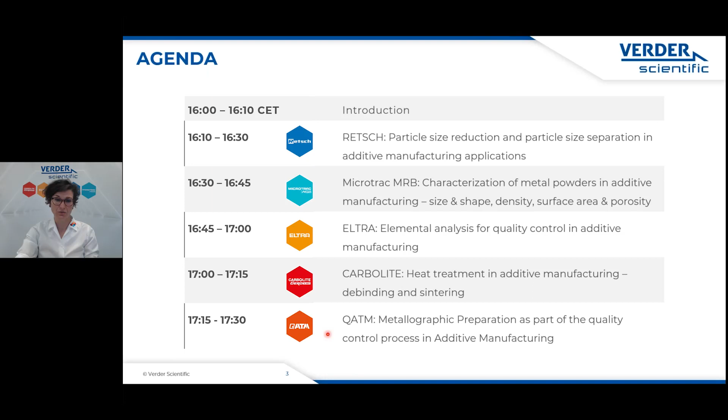I've already mentioned Verder Scientific quite a few times, but if you've come to this webinar via a newsletter invitation from one of our manufacturers or via their website, the name Verder Scientific probably isn't that familiar to you. So I would like to briefly introduce ourselves.

Verder Scientific is the umbrella, so to speak, under which our manufacturing companies ELTRA, Carbolite Gero, RETSCH, MICROTRAC, and QATM come together. And this umbrella is relatively large. We have 10 locations worldwide where development and production takes place, and around 22 sales offices of our own. We employ around 1,300 people worldwide.

So, but let's now get a closer look at our brands. Carbolite Gero is a leading manufacturer of high temperature furnaces and ovens from 30 to 3000 degrees C with a focus on vacuum and special atmosphere technology. And with more than 80 years of experience in thermal engineering, their products are used in research laboratories, pilot plants, and manufacturing sites worldwide.

The presenter for the Carbolite Gero part in this webinar will be Dr. Tim Ohnweiler from the International Sales and Product Development Team.

ELTRA is one of the world's leading manufacturers of elemental analyzers for rapid and accurate analysis of solid materials. Their elemental analyzers provide tailor-made solutions for a wide range of samples and concentrations. ELTRA's part in this webinar today will be presented by Dr. André Klostermeier, who is Product Manager and Application Specialist.

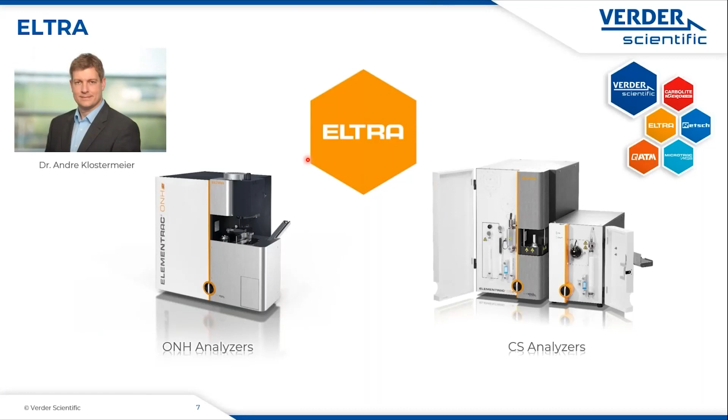RETSCH offers instruments for sample preparation and characterization of solids. They develop size reduction and sieving equipment, known for its excellent performance and operating convenience. The presentation will be held by Dr. Gerhard Beckers, longtime member of the RETSCH application team.

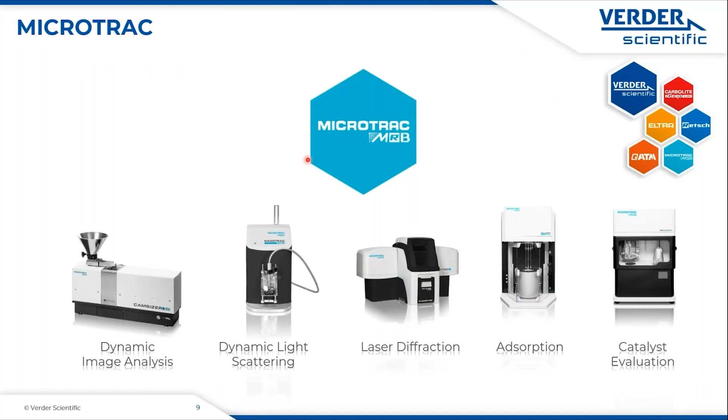MICROTRAC's product range offers solutions for particle characterization like size and shape, gas adsorption, surface area and pore size distribution, density measurement, and a lot more. Jörg Westermann, member of the International Sales and Product Development Team, will give you some more insights today. QATM is one of the leading companies for materialography, metallography, and hardness testing, and supplies both instruments but also complete laboratories, software, and consumables. Here, Parham Gemagami, member of the QATM Product Management and Application Technology Team, will hold the presentation.

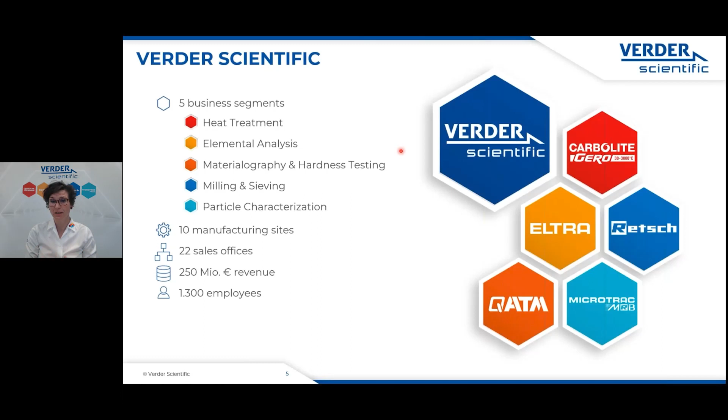So, as you can see, our companies cover different fields of applications which have one thing in common. They are all part of the quality control process in many industries and, in some cases, are also used in the production process. And what a great coincidence, additive manufacturing is a typical example for that.

In the quality control of raw materials like metal powders, MICROTRAC analyzers are used to determine particle size and shape, and ELTRA analyzers measure the carbon or oxygen content of these powders. Carbolite furnaces are employed in post-processing for debinding and sintering, and then ELTRA again comes into play when the element concentrations of the final components are analyzed for quality control.

This interdisciplinary approach within our group of companies means that we can offer you as our customers holistic solutions which take into account the whole process and not just one aspect. Here you can see that instruments from our manufacturers can be found in many parts of the additive manufacturing process chain, but more on this in the individual presentations.

Yeah, thank you, Rena, for your nice introduction. And I would like to welcome you to our presentation about additive manufacturing. I would like to directly start with the presentation about particle size reduction and particle size separation for different kinds of applications in additive manufacturing.

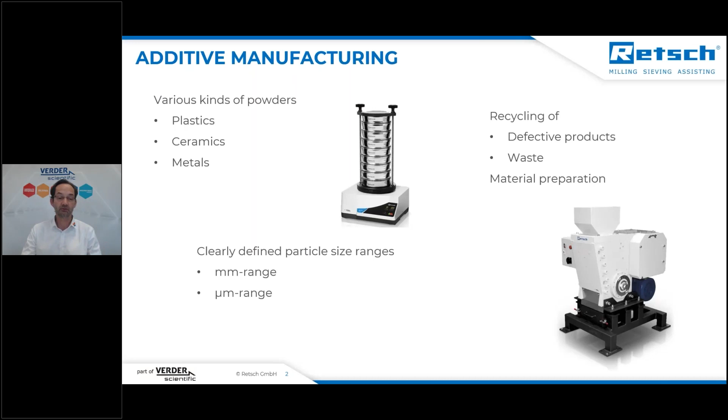When we talk about additive manufacturing, this covers various kinds of powders, and these powders can be plastics, ceramics, or even metals. These materials can have different sources, so the materials can come from recycling, like defective products which have to be removed into the process, or waste products like sprues from injection molding, but also raw materials have to be prepared beforehand. This preparation means the particle size has to be reduced or just analyzed or separated. Here we talk about clearly defined particle size ranges, so that can be millimeter range or even micrometer range.

So when we talk about particle size reduction, that means that the particle is ground, broken, milled, whatever. I've got 3 examples here for you, and I would start with the green bodies. So green bodies, like here, for example, made of metal, but also feedstock, or as shown here, a resin can be reduced in size. Starting with the green bodies, there was a task to grind this, let's say, pressed metal of several kilograms down to a size of below 2 millimeters for a recycling process.

But as these particles can be very hard, we need a strong machine to grind this material. And here we have used a jaw crusher, a BB500, and we have set this machine to a gap size of 1 millimeter.

That means the particles have to pass a gap of 1 millimeter, and then they need to be ground, they break down. And with this machine, we were able to grind several kilograms within a few minutes down to 2 millimeters.

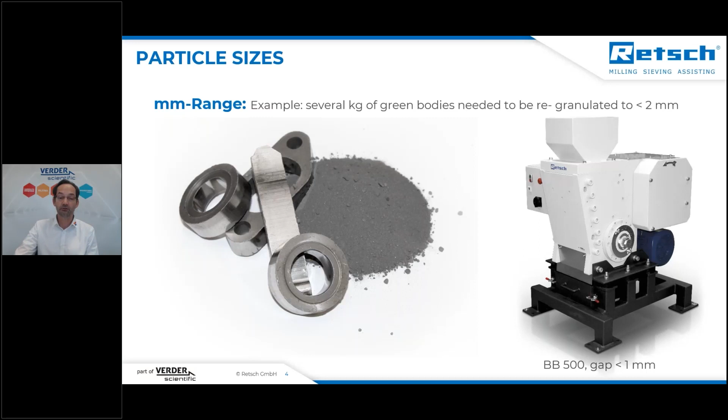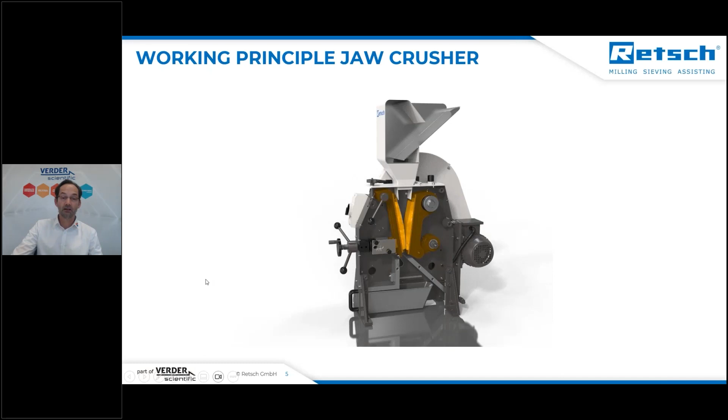Another application is recycling in the preparation of feedstock. So this is, frankly speaking, just a pressed powder into agglomerates, but these big chunks are too big to be processed further on, so they also need to be decreased in size.

But here the task was a bit more difficult, because for an injection molding or extrusion process, we need to grind the particles down to a few millimeters, but we had to avoid the generation of fine powders. This is quite difficult because it's easy to grind smaller, but you always end up with lots of fines in your sample.

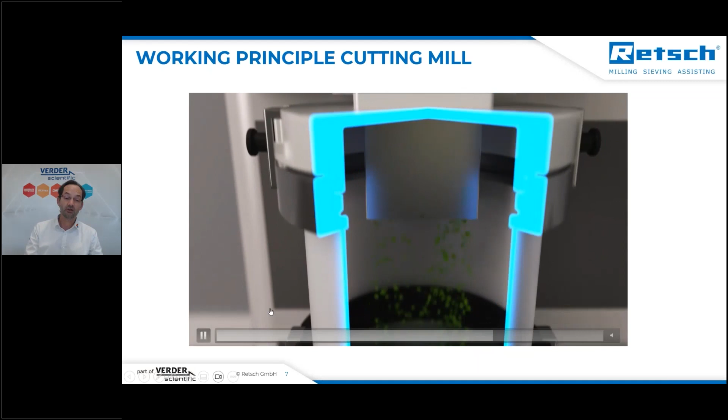So what happens inside the cutting mill? Here's a short video about the principle, where you can see the sample drops into the hopper, and then it enters the grinding chamber, where a rotor is rotating at a set speed. In this case, it was 400 RPM. While the material is rotating, it is cut between the knives and the cutting bars, and this continues until it is fine enough to pass the sieve placed at the bottom, so all the material can drop down afterwards into the collecting receptacle, from which it can be taken for the next step.

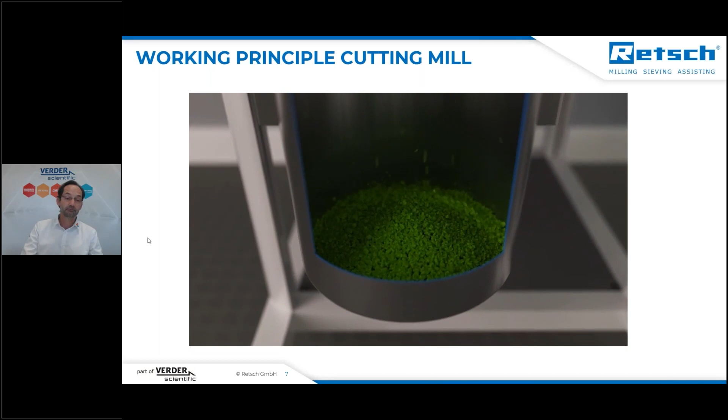So just switching to the next slide. Another application was grinding of resins down to a micrometer range. This is also easily possible, but you need a special machine for that. In this case, it was a resin with the size of 2 to 3 millimeters that had to be ground down to less than 50 micron to allow use for 3D printing. We need this small size to avoid clogging of the nozzles, and then we need a very fine powder.

Here we have used an ultracentrifugal mill, ZM300, with a revolution speed of 18,000 RPM. This is a very high speed, I will tell you later on what this means. Using a ring sieve of 0.12 millimeters allows us to grind more than 60 to 70% of the material to less than 50 micrometers. So what happens inside the ultracentrifugal mill?

Here you can see the machine opened, and inside the machine you find a small cassette, a metal cassette. Inside this cassette, the grinding takes place. Normally this is closed and the material drops in from the top into this cassette.

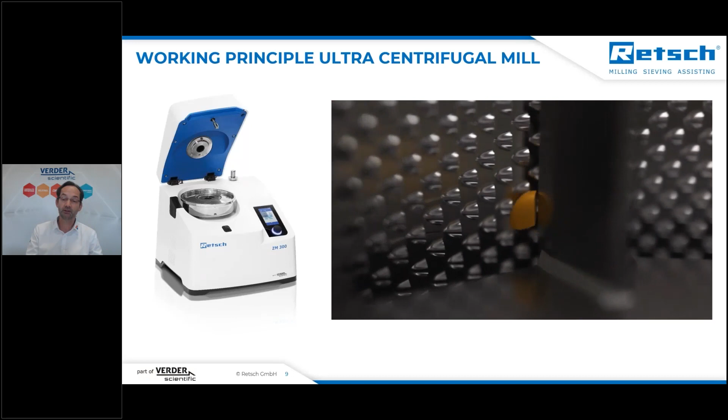So what happens during grinding? The material drops in either manually or with a feeder, like shown here, into this cassette. It enters the grinding chamber where the rotor is rotating at very high speed, causing the sample to impact against the rotor teeth, and subsequently it is ground by shearing along the sieve which surrounds the rotor. Depending on the opening of this sieve, you can create very fine powders or eventually even coarser sizes. Then the sample can be taken by just taking out the cassette, and you got your fine powder to be used for the next step.

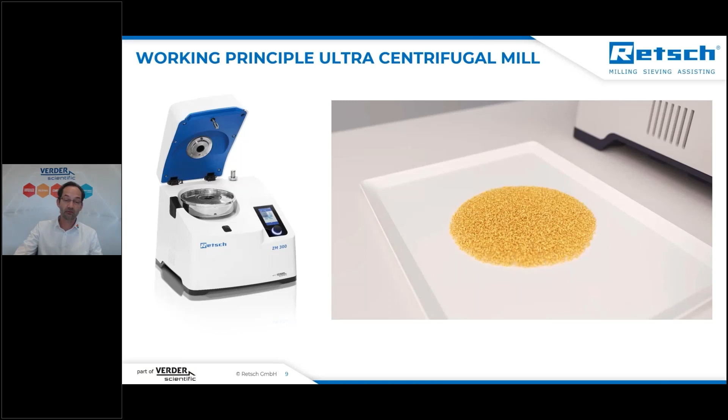As I mentioned before, we have used for the resin, for example, a sieve of 0.12 millimeters, and we were able to grind 60 to 70% below 50 micrometers. But we need all of the material to be fine enough to avoid clogging of the 3D printing nozzles, so sometimes it's necessary to remove oversized particles. This can easily be done with a sieve shaker.

So what does that mean? We've got a possibility to use sieves to separate particles. Either you separate these particles with a certain sieve size, or you can completely analyze the particle size distribution of your sample. Here we are talking about the micrometer range.

Here I show you just an example of the separation of a metal powder, where particles bigger than 53 micrometers had to be removed in order to allow the use of this fine powder for 3D printing.

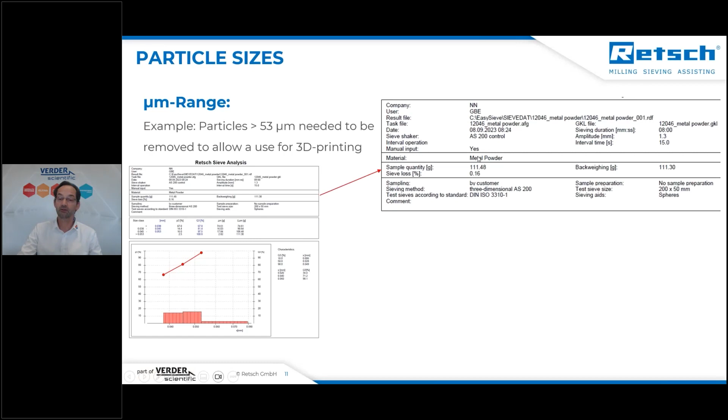This now shows a complete protocol of the sieve analysis. We've got detailed information about the complete process, like information about the material, the kind of sieving process, the machine used, and lots of other information. Most importantly, you get a tabular result at the end, where you can see how much of your particles are smaller than a certain size.

In this example, 67% of the whole powder is smaller than 38 micron. On the other hand, you see that 2.5% of this powder is bigger than 53 micrometers. So we were able to remove this fraction of bigger particles from the whole sample, recovering 97% that can then be used for the 3D printing process without any problems.

It's also possible to get lots of other information or characteristics, which can be individually set in the software to be calculated and give you more information about the particle size distribution of your product. So this is just a sieve analysis result. How is it produced? For this purpose, we use a so-called sieve shaker.

The sieve shaker is used to take a lot of sieves. Here in this example, we've got 8 sieves on a collecting pan, and the sieves are set up in a descending order, meaning we've got a big sieve on top and decreasing mesh sizes in the other sieves.

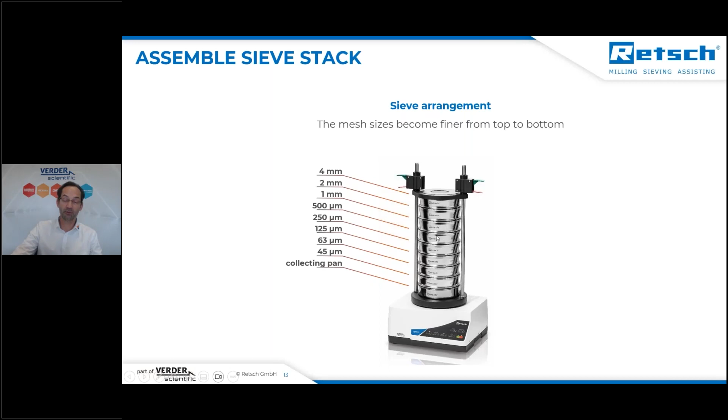This is done with a sieve shaker, meaning the whole sieve stack is jumping up and down, as shown here. With this vibration, the particles start to jump, as you can see in slow motion, and this allows the particles to completely rotate and be compared with the mesh in another orientation.

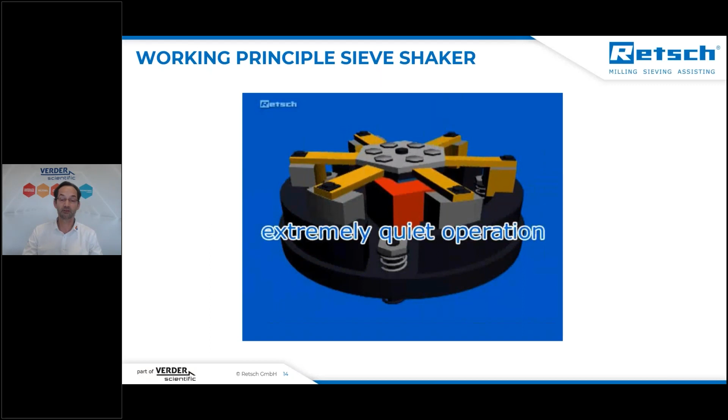So you are able to separate all the particles by moving them very strongly, and this is done with an electromagnetic drive. As we use electromagnetic drives, you've got a very quiet operation, which is also very comfortable to use. So far about the possibility to separate particles with sieve shakers.

Thank you, Rainer, for the very nice introduction. It's my pleasure now in the next 15 minutes to guide you through the products that MICROTRAC MRB is offering for the 3D printing community. That means we will speak basically about the characterization of metal powders with respect to the size and shape of the particles, as well as density, surface area, and porosity.

My name is Jörg Westermann. I'm working for MICROTRAC MRB for 17 years, as a product specialist, and I have some experience with metal powders and our customers in the metal powder community.

In this presentation, we will be talking about ISO ASTM 52907, which explains methods to characterize metal powders for 3D printing. We will also mention some other ISO standards related to density, surface area, and porosity of metal powders and additive manufacturing parts.

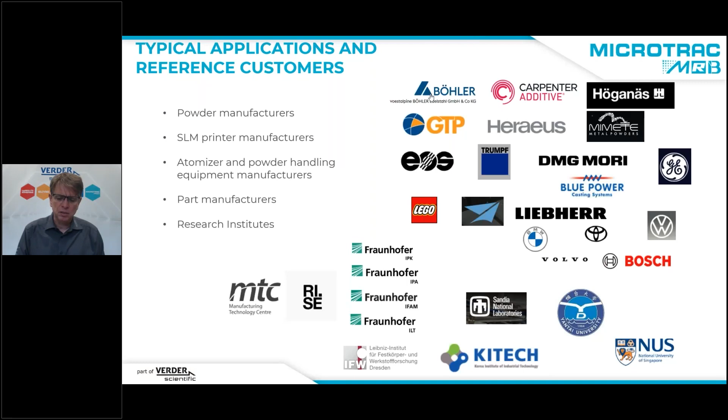Our customers in the additive manufacturing community come from the whole value chain. Our instruments are used by powder manufacturers such as Böhler, Carpenter, or Höganäs. We sell to printer manufacturers such as EOS, Trumpf, DMG Mori. We sell to companies producing atomizers and powder handling systems, and to companies producing parts using printers and powder, such as automotive or aerospace companies. And last but not least, we sell our instruments to research institutes such as MTC in the UK, RISE, Swerea, Kimab in Sweden, and Korean, Singapore, Chinese, US, and German institutes and universities.

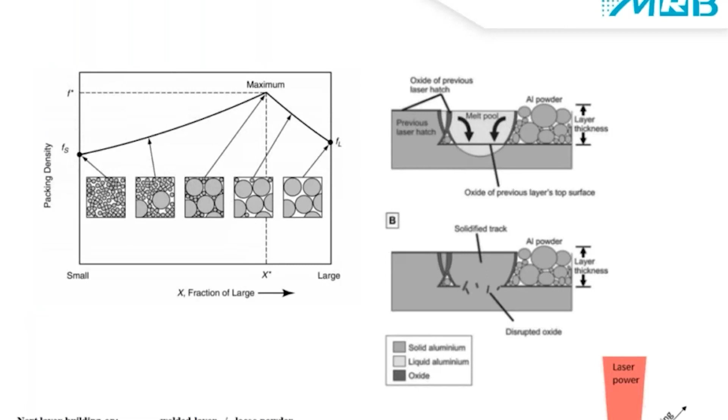So why is particle size and particle shape analysis important for additive manufacturing? First of all, it's about the packing density. When we have powder with a size distribution that is nicely wide, the gaps between bigger particles can be filled by small particles, achieving good packing density. If we have only small particles or only big particles, this cannot be achieved. Also, the oxide content—how much surface area the particles have, how much contamination is on the surface—depends on the particle size distribution of our powder.

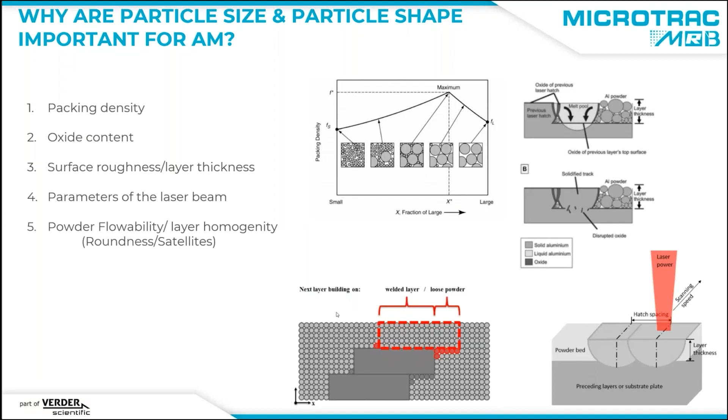Surface roughness and layer thickness matter, since additive manufacturing in many cases is a layer-by-layer process, and if we have large particles we cannot achieve thin layers. The parameters of the laser beam also depend on the properties of the powder—larger powders need different energy to melt than smaller powders. Last but not least, when creating layers in the manufacturing machine, the flowability of the powder has a big influence on the homogeneity of the layers. A nice flowing powder consisting of round particles with few satellites achieves a more homogeneous layer than irregular shaped particles. There are always exceptions to the rule, but this is the basic idea.

So when powder is sold or purchased, the powder quality is checked, and density, particle size, and particle shape are important parameters to understand if the correct powder is being used.

For the size analysis, 3 different methods are recommended by the standards and guidelines. The key methods used in the field are sieving, dynamic image analysis, and laser diffraction. Our product portfolio covers all these 3 methods.

Our sister company RETSCH is selling sieves and sieve machines, and MICROTRAC has the complementary dynamic image analysis and laser diffraction.

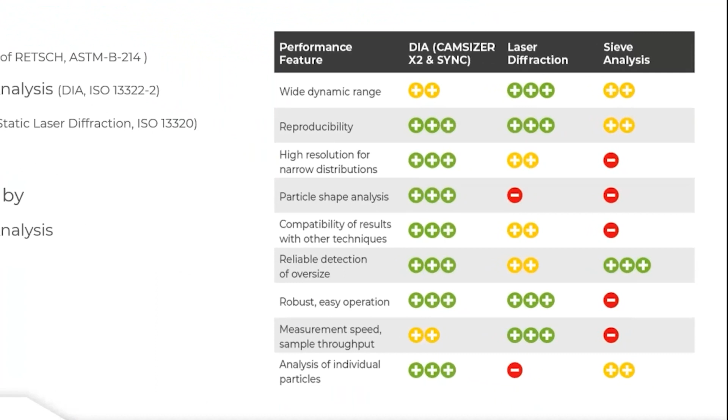When we look at the different methods, we can see that they have advantages and disadvantages. For example, when we look at the width of the dynamic range of the particles, we have small particles and large particles. If the small particles are much smaller than the big particles, then laser diffraction is the method of choice. The sieving and CAMSIZER cannot measure such a wide range of particle sizes.

However, for additive manufacturing, particle size range is typically from 5 to 45 microns, or maybe 5 to 150 microns. In this range, all the different methods provide good results. Repeatability and reproducibility are also important topics, as well as the resolution.

If I have mixes of particles, mixes of different samples, by dynamic image analysis I can see the blend of powders more clearly than by methods like laser diffraction or sieving, where the resolution is not as high.

Particle shape analysis is a unique feature of image analysis. It cannot be done by laser diffraction or sieving, and dynamic image analysis also offers the possibility to emulate the results produced by sieving. So if the old way to measure the size distribution was a sieving method, then with the imaging method we can get results which are very similar to the sieving method.

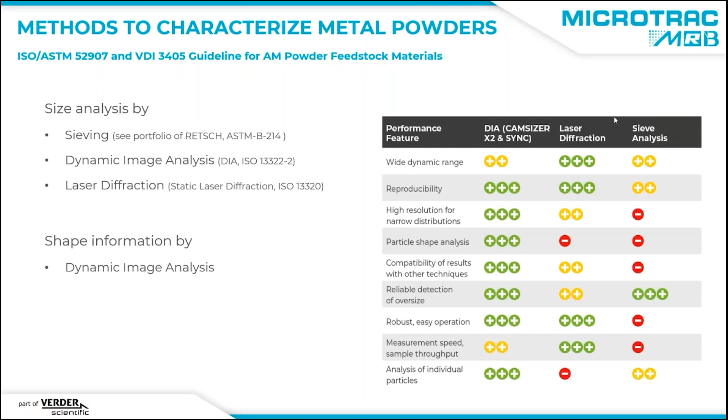The sieve shaker can also detect particles which are too large, and the image analysis can detect large particles as well as odd-shaped, bad-shaped particles like needles or flat particles.

Operation of laser diffraction and image analysis is typically much faster and much easier than the sieving operation, which needs more time and is much more time consuming. So the measurement speed for image analysis and laser diffraction is higher, and the big advantage also in dynamic image analysis is that we can see the results for individual particles. We can measure not only the size, but also the shape of single particles.

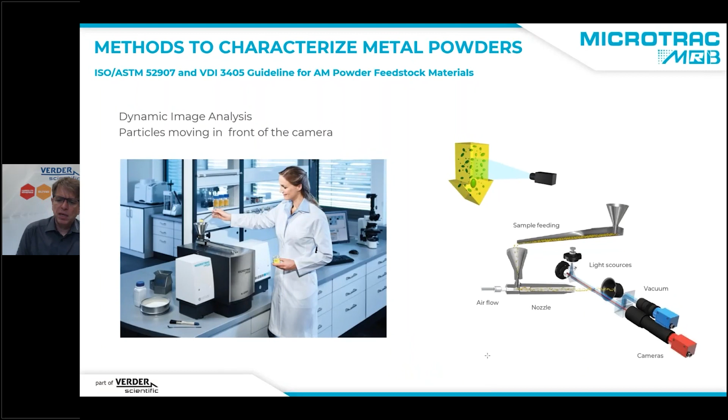So how does the dynamic image analysis work? Basically, what we do is have a camera and let the particles move in front of it. This is the basis for the name dynamic image analysis. We have a camera at a fixed position and we are moving the particles in front of the camera.

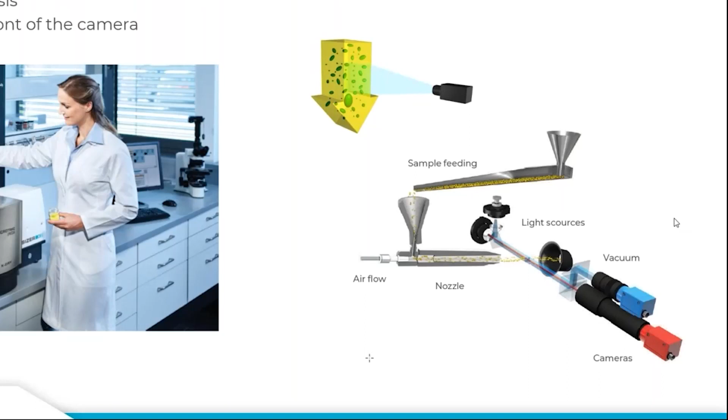In reality, what you do is take a teaspoon or 2 teaspoons, maybe 5 to 15 grams of metal powder, and put it in a funnel. Then we have a hopper. The material moves on this hopper, falling into a small funnel, and with air pressure the particles are dispersed. That means we have single particles, not many particles at the same time. Then these single particles fly through our detection area, where we measure the particle size with 2 cameras, and then the particles are collected in a vacuum cleaner.

This way we can measure the size of the particles. For example, we can measure the thickness or the length of the particles. Of course, if we have nice particles like the round particle in the middle, then width and length are the same. But if we have irregular shaped particles like the one on the bottom, we get different values for length and width, and both numbers are interesting because they tell us if the material is nice and round, is homogeneous, will flow nicely, or will be a particle that creates problems when we create our layer in the printer.

Dynamic image analysis very often allows us to see the picture of the particle, and we can see the numbers calculated for this single particle. We can calculate the size of the particles, but also numbers which describe their shape. For example, the width to length ratio tells us whether we have nice round particles, or irregular shaped particles with satellites, and we can see if the quality from one batch is the same as the quality of the next batch.

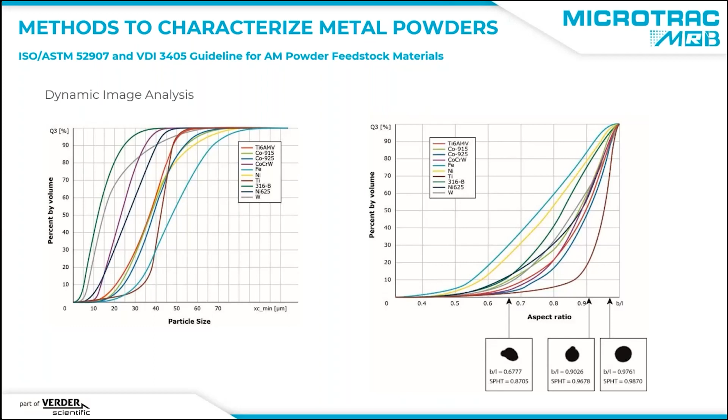The dynamic image analysis works independent from the material type that we have. We can measure all types of metal powders which are commonly used in 3D printing. It doesn't matter if we're looking at titanium powders for medical applications, steel alloys, nickel, or tungsten. All types of metal powders can be measured by dynamic image analysis, and both the percentage of particles versus particle size and the percentage of particles versus particle shape can be measured independently.

So I can see how many particles are large and how many particles are small. Do we have too much dust in the sample? But we can also see, yes, all our particles have a nice round shape, or we have a lot of irregular shaped particles in our sample.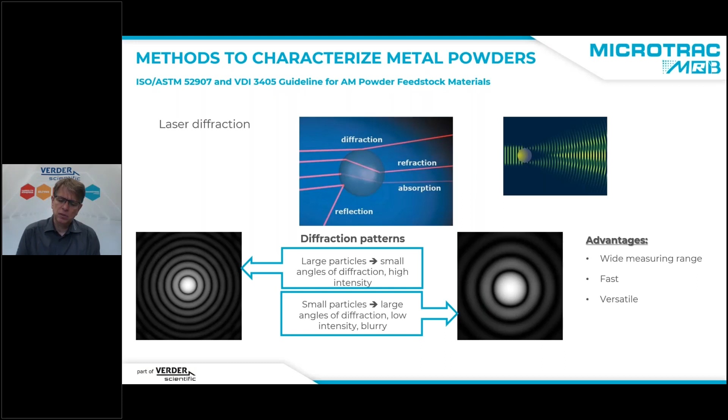The second method I want to mention today is laser diffraction. What happens here is we shine laser light onto our particles. When the wave of light interacts with the particle, we have diffraction, refraction, absorption, and reflection. This diffraction for the relatively big metal particles causes a diffraction pattern, and this is what we measure. So we measure the light intensity and the direction of the scattered light. From this, the instrument calculates the size distribution of all particles, because the big particles scatter the light forward and the smaller particles scatter the light sideways.

The instrument for laser diffraction is the so-called Sync. The previous model was called S3500, and the S3500 has actually been used in many quality control labs for the metal powder community, so it's maybe a very common instrument there. The latest model is called MICROTRAC Sync.

Both instruments feature the same laser setup. We have laser light which shines on the sample. At the sample, the light is scattered. We are using 3 lasers from 3 different directions which scatter the light onto 2 detectors. In addition, the camera allows us to measure the particles in images. So we can see images and scattering pattern, and we can calculate laser diffraction results and imaging results at the same time. This is a very unique combination which is not available in any other instrument.

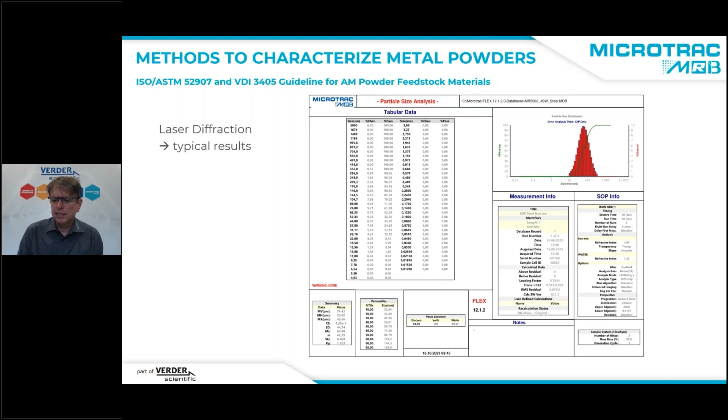The results that we get are basically the size distribution from the laser diffraction experiment. So we get the percentage of particles which are smaller than a given size, or we can get the derivative distribution - it's just a matter of calculation. In addition to the size distribution, with the Sync instrument and the integrated camera, we can also get pictures of our particles, and we can see if we have nice and round or more irregular shaped particles in our sample.

In addition to particle size and shape, MICROTRAC offers also measurement of the density of the powder. Here we have an instrument called Bel-Pycno, and what we do basically is we give a certain mass of powder into a sample chamber. Then we load the sample chamber with gas, and the pressure that we measure tells us how much volume in this sample chamber is occupied by the particles. This is typically done with helium, so it's a helium pycnometer.

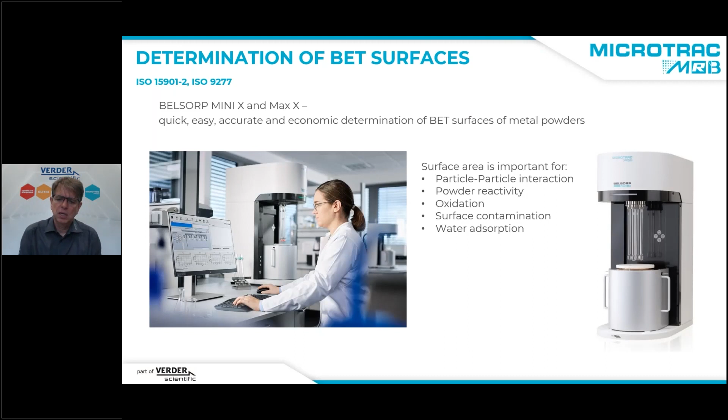In addition to the density, in many cases it's also interesting to study the surface area of the particles, how large is the surface area of the particles, because the surface area tells us about the possible particle-particle interaction. The more surface area, the more reactivity, the more interaction, the more contamination, water adsorption, and also oxide layer on the surface we may have.

So the surface area is analyzed by the so-called BET method. The instruments for analyzing the surface area are the Bel-Sorb Mini-X and Max-X. These instruments use the procedure from Brunauer, Emmett and Teller, BET, for studying the surface area. Basically, what happens is you cool the sample to the temperature of liquid nitrogen. Then nitrogen molecules are let into the chamber, and these nitrogen molecules condense on the surface of our sample, because it's the temperature where they freeze, basically. And then the surface is covered slowly but surely by these nitrogen molecules.

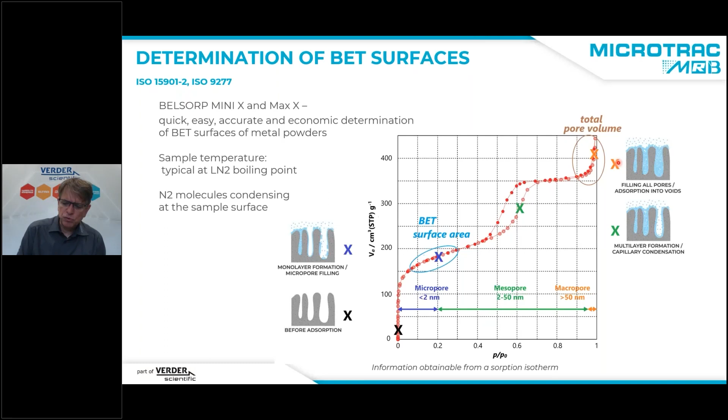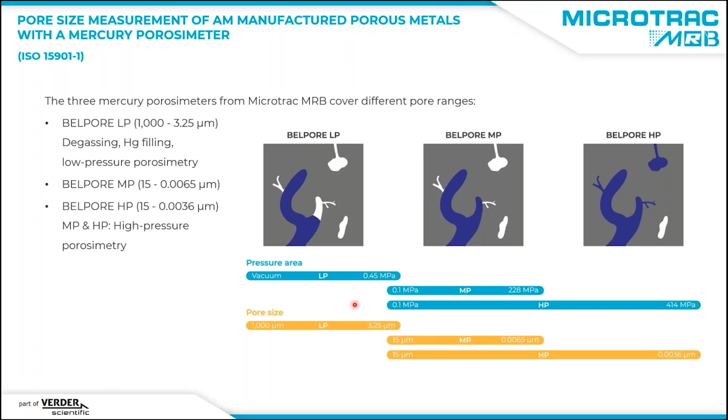Last but not least, it's also interesting, especially if you have printed parts, to study the porosity of the material with a mercury porosimeter. That means we have liquid mercury, and we apply some pressure to press the liquid mercury into our sample material. The sample material, as I said, could be the powder, which is usually quite compact, but it could also be a finished part.

So we press the liquid mercury into the part, and we can study at which pressure the pores are filled. If we apply a low pressure, the liquid mercury will go into the large pores, and the higher the pressure, the smaller and smaller pores can be filled.

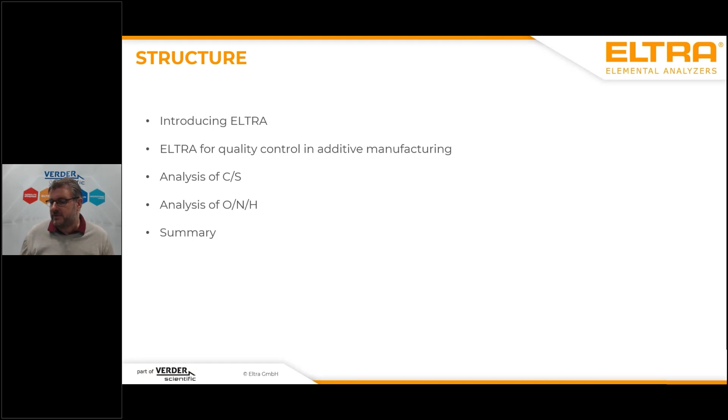Let me give you a short structure of what we are talking about. First, I will introduce ELTRA - maybe you know us or maybe you don't. Then I will give you a short idea of what ELTRA analysis and quality control means in the additive manufacturing process. Then we will talk about the most prominent analysis topics for us, which means analysis of carbon and sulfur, and analysis of oxygen, nitrogen, and hydrogen. And then at the end we will have a short summary, and then we are finished. Let's start.

ELTRA is a company located in Haan, near Düsseldorf. We were founded in 1981, and our portfolio is combustion and inert gas fusion analyzers. We are focused on the analysis of carbon and sulfur and the oxygen, nitrogen, and hydrogen content. In addition, we also have thermogravimetric analyzers.

For additive manufacturing, usually the carbon sulfur content is of interest, as well as the oxygen, nitrogen, and hydrogen content, because these elements influence the properties of the powder as well as the finished products.

Our functional principle for all analyzers is always the same. We have a sample, put some energy on it, and then the sample combusts or is burned or melts - however it is destroyed. During the destruction process, we have some carrier gases, which usually mean oxygen or nitrogen, or maybe also just helium. Then we measure the released gases, which could be CO2, SO2, and also hydrogen and nitrogen. We always have a destructive analysis, and we are always analyzing gases in the sample.

This is the common principle. But keep in mind that depending on your sample, or the requested analysis, the applied technique is a little different, and all settings for the analysis are a little different. However, we can provide full solutions for every common sample.

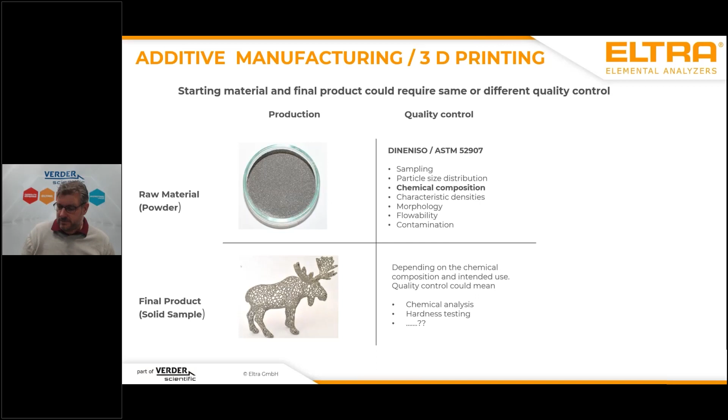What element has the biggest influence? There's no single most relevant element, but especially for medical products, hydrogen measurement is a bit more important than other elements, because of the effect of hydrogen embrittlement. For medical applications, a break inside the human body would be really dramatic, and this is something you'd like to avoid.

You cannot predict the influence of an element for every matrix, but generally: carbon influences technical properties like melting point and hardness. Sulfur influences machinability. Oxygen is an indicator for good tendency for corrosion. Nitrogen can influence hardness. And as mentioned, hydrogen can dramatically influence the stability of a product - is this product really stable when you use it? For this reason, hydrogen analysis is highly recommended, especially for aerospace and medical applications.

What does this mean in detail? As I mentioned before, we have to provide different solutions for carbon, sulfur, oxygen, nitrogen and hydrogen analysis. The usage of our analyzers is, in sum, very easy.

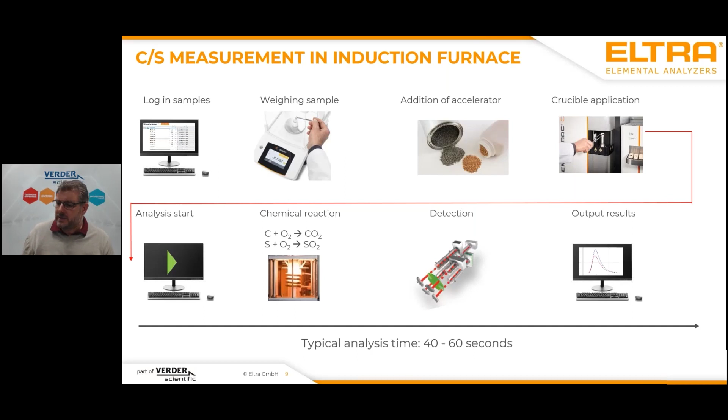The basic things important for carbon sulfur analysis with ELTRA are the general application settings. We are free to analyze every form of sample, which means you can apply powder, drillings, chips, granule samples, or solid samples in any shape. This is a big advantage of this technique.

When you're used to performing measurements with optical emission spectroscopy, you usually have to provide a special sample shape, or maybe have to take your sample and disintegrate it in acid. But for combustion analysis, it's very easy - you just take your sample, put it in the crucible, and then apply your accelerator.

Just to give you an idea about typical results - we have nickel powder analyzed in an ASTM test cycle. We get this powder, put it in our crucibles, add the accelerator, just 1.7 grams of tungsten, put it on the pedestal, and run all these samples. These are the typical measuring curves you see here.

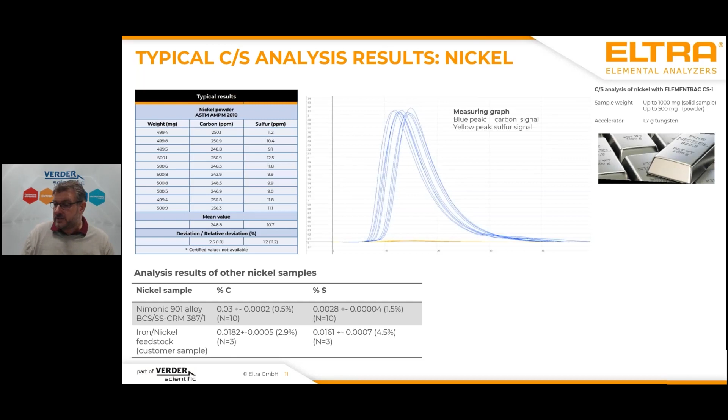The application doesn't have to be changed, and you can make a reliable analysis for a lot of samples which you get in your laboratory. But usually you are fixed to some special feedstock samples, so you expect always the same concentrations. And that's it for carbonate sulfur analysis. You don't have to consider more.

ONH analysis is a little bit different. This is due to the fact that you have to remove oxygen and nitrogen, which are present in our atmosphere in a large amount. You log in the sample again, weigh it, apply the sample, but then you have to apply it to a sample port which can be flushed with inert gas like helium. Then you start analysis. We have a preheating of a crucible, then some chemical reactions, and then a different detector than this kind of analyzer - on one hand IR cells, but on the other a TCD cell, which is responsible for nitrogen and hydrogen measurement.

Yeah, that's it. It's again like usage by academically skilled persons and not academically skilled persons. For steel and iron, we again have a maximum amount of about 1000 milligram. It's not limited to powder or solid samples - you can also apply drilled or chipped samples, no problem. For titanium analysis, you have to consider the ASTM regulations, which mean 100 milligram is the maximum for ON analysis and approximately 300 milligram is the maximum for hydrogen analysis. This is not due to our analyzers, but just due to regulations of the standard.

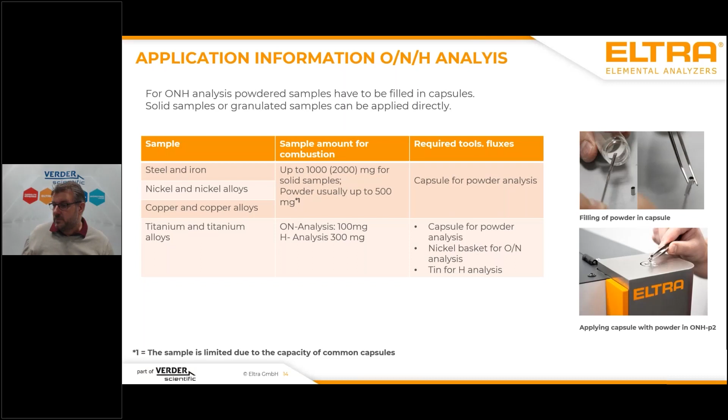And the application of different forms is easy - a solid sample is applied directly to the furnace, and powders or drilled samples just have to be applied in capsules. Yeah, and that's it. Typical results look like this.

And as you can see, like carbon sulfur analysis, oxygen and nitrogen analysis can be very, very precise, and is very easy for all kinds of samples and all kinds of sample shapes.

This is the reason why I can now come to a summary, because in detail it may be a little different what you have to do for your samples, and details you have to consider - sometimes we get powdered samples based on rare earth materials, or maybe very cost-intensive samples like silver or gold, and there you have to consider other details. But in sum, you take your sample, combust it in an analyzer, and measure the released gases. This is the same for solid samples, powdered samples, drilled samples. It also doesn't matter if you have a titanium-based sample or an iron or nickel-based sample - we are doing always the same, but sometimes we have to consider a lot of small details.

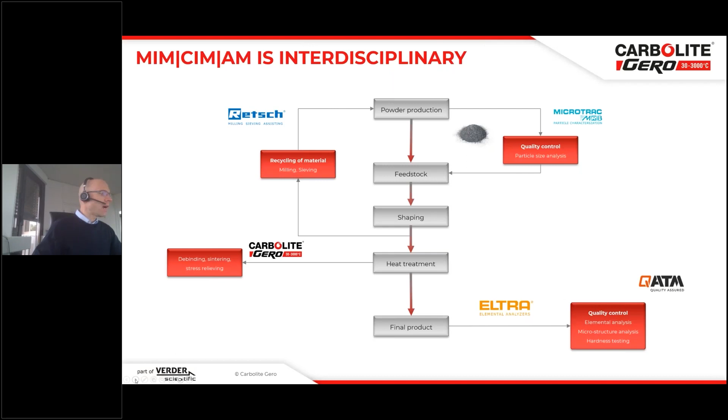But first, a brief overview. How does additive manufacturing or metal injection molding look? What are the different steps? It all starts with the raw material, and the raw material is always a powder, which can be metallic or ceramic.

These powders are mixed with a binder, and the so-called feedstock is generated. This can be an extruded feedstock, or a granulate, which is most widely used for metal injection molding.

The next step is printing, which is very important, and here we have many different methods. It can be an injection molding machine, the more classical method established since the early 70s. But nowadays 3D printing becomes more popular and is now an industrial application, with many different printing steps such as fused filament printing or lithography-based processes.

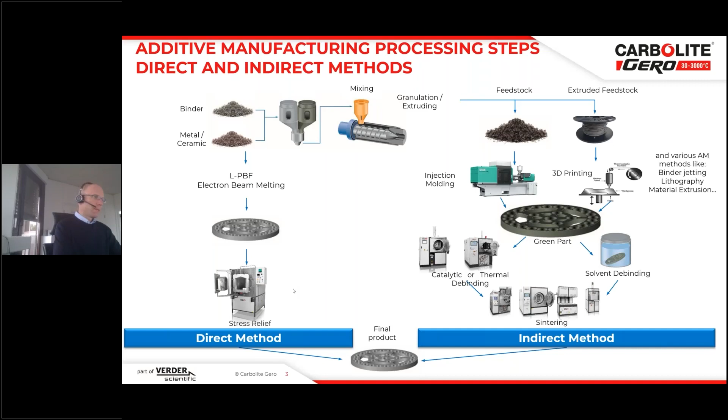Having a look at the materials, I mentioned it already. It can be metals, heat treatment for metals after additive manufacturing, but it can also be heat treatment of ceramics. In ceramics, we distinguish non-oxide ceramics and oxide ceramics. The oxide ceramics, for instance, are things like aluminium oxide or yttrium oxide. On the non-oxide ceramic side, we talk about high-performance ceramics such as aluminium nitride or boron nitride, silicon carbide, and so on.

On the metal side, you see the typical materials, the typical feedstocks which are available, but also titanium, of course, needs heat treatment. For both metals and ceramics, we offer solutions of debinding and sintering with a very broad range of furnaces.

I don't want to go into detail, but you can start with a simple tube furnace for research and development, for smaller part production, or for some trials. Next to that, you see an industrial machine for debinding and sintering in metal injection molding. It can also be that you do some kind of drying procedure before, where we have solutions here, the so-called PN oven from Carbolite Gero. So you see a range from small furnaces up to big furnaces used in the industry, both for metals.

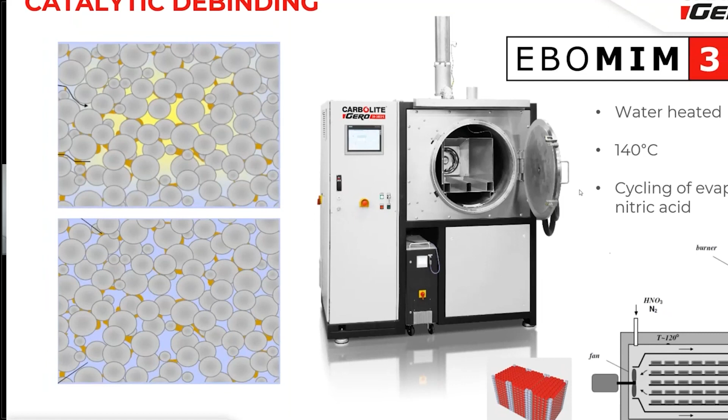And here we have a solution. This is an industrial scale solution. We have it in different sizes, and this is used all over the world, mainly for metal injection molding, but also for additive manufacturing.

I told you before, after this debinding step, with a solvent or with a catalyst, you still have the backbone binder in the system. And this backbone binder you can remove only by a thermal debinding step.

That is why the sintering furnaces have to perform two things. First of all, they need to remove the backbone binder. The orange parts here need to be removed, and this normally happens between 400 and 600 degrees C. So this profile is highly important, and every time we talk about debinding and sintering, you will see such a profile.

Because first, the backbone binder needs to be removed between 400 and 600 degrees C. After this backbone binder is removed, we need to sinter the part to the final density. So now the powder particles need to sinter together, and this happens 20% below the melting point of the material, and that is what you see here - 20% less than the melting point, you have a diffusion process.

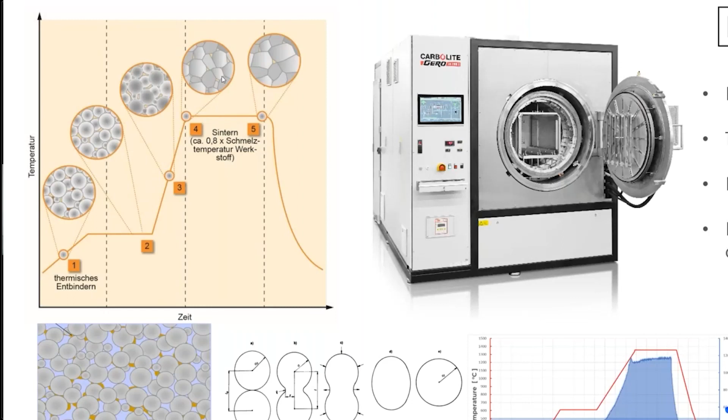You also see it here, you have two powder particles, and by material diffusion, you sinter the part to its final density. This is the most important thing to understand in 3D printing about debinding and sintering, because this is true when I talk about a metallic part, but also for ceramics, it's exactly the same.

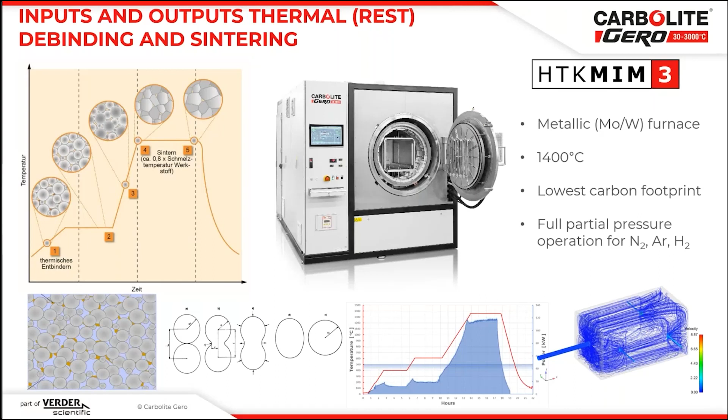But of course, the atmospheres are different. So here I show you our heat treatment solution, the HTK MIM for metal parts. It's a metallic furnace, which you can use under different atmospheres, even an atmosphere of 100% pure hydrogen, which is required for very high quality parts, but also argon, nitrogen, vacuum.

If the customer has special requirements, for instance titanium, we can even equip this furnace with a high vacuum option, so you can do the whole sintering step also in high vacuum.

We have a safety concept for this furnace, and one thing that is very important, we just recently calculated the product carbon footprint, which becomes more and more important because of the high energy cost. These machines are highly energy efficient, even at its maximum temperature of

1400 degrees C. So this is our solution for metals, but we have similar solutions for debinding and sintering of ceramics. You see, we developed this product a lot. We even did CFD simulations. So we did some modeling of all the parts and simulated the gas flow to have the perfect condition both for debinding and sintering.

Thank you, Reina, for a nice introduction. My name is Parham Gemagami, and I'm working as lab manager in Germany. I will show you today the metallographic preparation of additive manufactured components.

Here is the metallographic preparation as a part of quality control in additive manufacturing. Today, I will show you the additive manufacturing process very briefly, why it's important, the quality control of additive manufactured components, some images so we know what expectations we should have from the metallographic preparation, some hints for the cutting of additive manufacturing components, some hints for mounting, and then we will go to the grinding and polishing, and then we will see the results for different materials. At the end, I will show you the hardness testing and the image analysis.

Here is our lab in Mammelzen, Germany. On the left-hand side, you will see the cutting area from the table cut-off machines, and on the right-hand side, you can see the grinding and polishing area. At the very end of the lab, you can see the hardness testing and also image analysis.

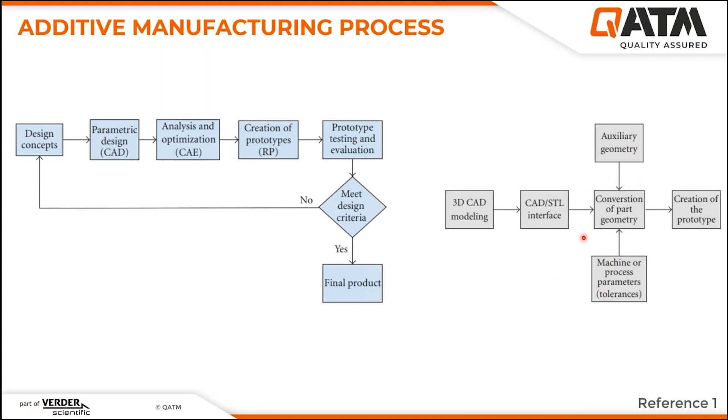Here on the right-hand side, you can see we start from the 3D CAD, and then we go to the STL file, and then with the auxiliary geometries and machine and process parameters, we can optimize our process and go to the creation of prototype.

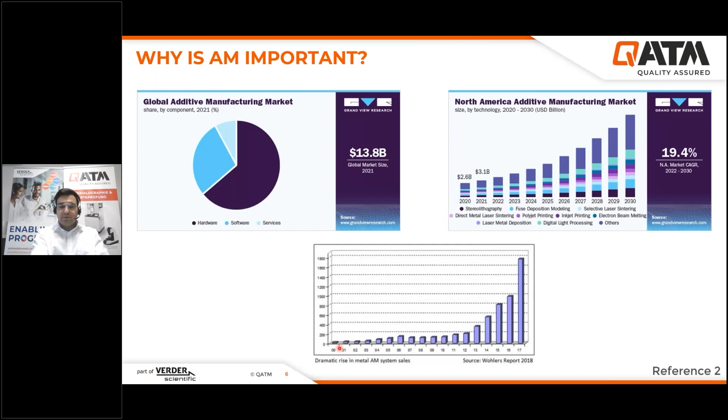Now, I will explain why additive manufacturing is important. On the left-hand side, you can see the global additive manufacturing market is something like $14 billion. In North America, from 2020 to 2023, and into the future to 2030, we can see constant growth in the additive manufacturing market. At the bottom, you can see the dramatic rise in metallic additive manufacturing systems, and you can see the demand from 2000 to 2017 increased dramatically.

Here is the area of interest for us. The metallographic preparation here plays a very important role. What do we expect to analyze?

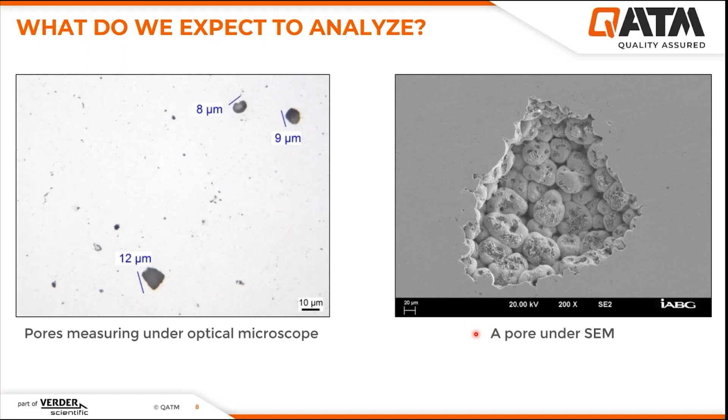Here are some images from literature, and you can find the references later in the presentation file. On the left-hand side, we can see pore measuring under optical microscope, and on the other side, a pore under scanning electron microscope. We can also see pores under optical microscope, and some other defects we can encounter, such as not melted particles.

With this introduction, I want to start from the cutting process. We should be aware that the properties of additive manufactured samples are not isotropic, they are anisotropic. It means that in different directions, we have different mechanical, physical, and microstructural properties.

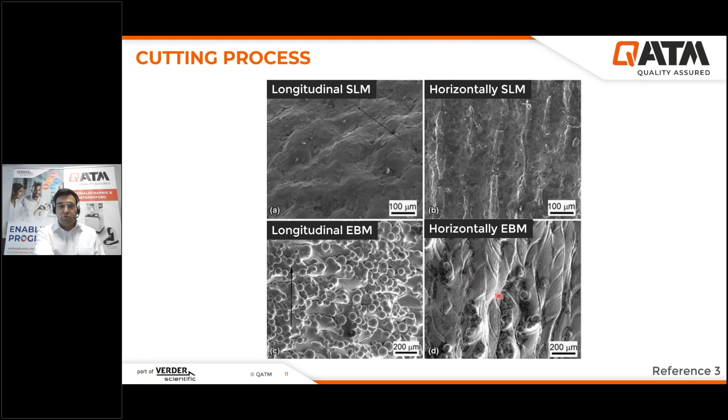Here we can see, for example, the microstructure of longitudinal selective laser melting and on the right-hand side horizontally. Below you can see the longitudinal electron beam melting microstructure in comparison with horizontally, and they are different from each other. We should be aware of which direction should be evaluated.

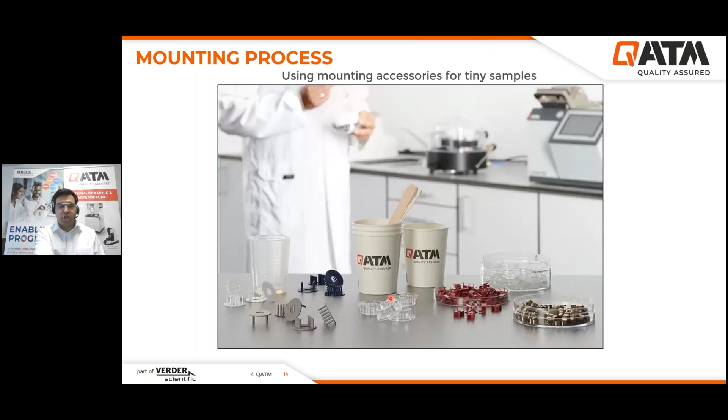Now I want to start with grinding and polishing and show you the preparation methods for different materials. I'll start with the maraging steel.

Here you can see that we start the grinding with Polaris H. Polaris H is a diamond grinding disc with diamond abrasive particles and resin between them. Very shortly, we can have a very plain surface and start polishing with Beta 9 micrometer, Gamma 3 micrometer, and Omega for final polishing.

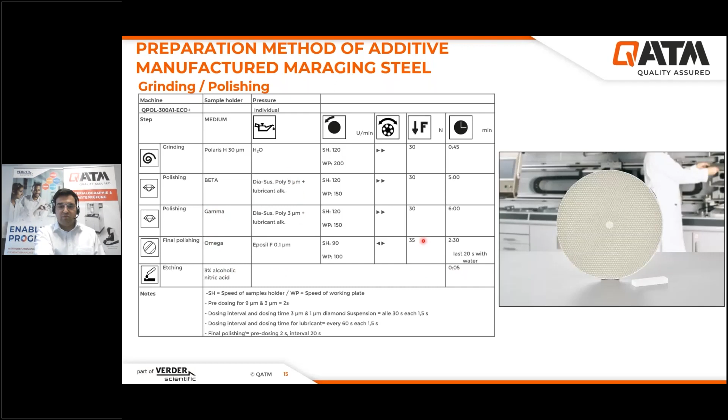We etch the samples with 3% alcoholic nitric acid for just 5 seconds. After that, we can see the structure under a stereo microscope.

As you can see here at low magnification, we can see the outline, a pattern, and also the spacing between the outline and the pattern. When we go to higher magnification, we can see the spacing between the pattern and also the pattern angle, and different parameters can also be measured on these stereo microscope images.

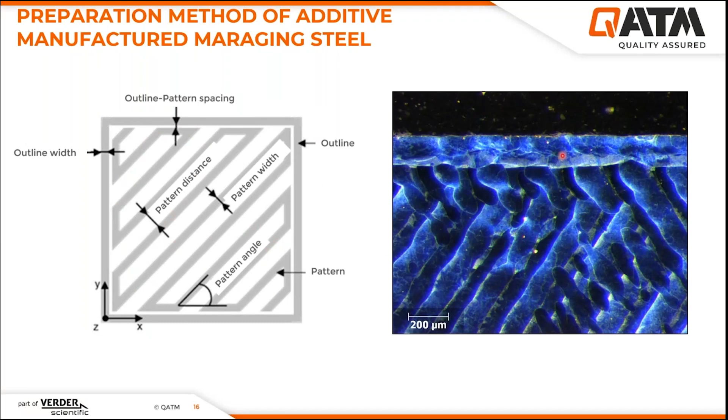When we go to the optical microscope, we can see the laser layers under the microscope, and also the grain boundaries and the boundary between the laser layers.

To have very clear boundaries, it's very important to not have deformation and to have the right metallographic preparation. Because of that, metallographic preparation with the right materials, consumables, and also right parameters is very important.

Now I will show you the preparation method for additive manufactured aluminum silicon alloy. Here we use SiC grinding paper, but with no elasticity or lower elasticity, because on the right-hand side you can see the working plate, magnet foil, and on the magnet foil you can have the grinding disc or adapter disc.

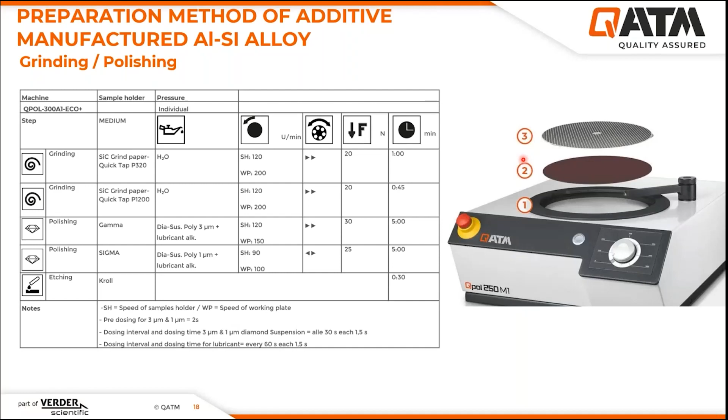Here, the adapter disc between the SiC paper and working plate is a Quick Tap. Quick Tap is an adapter disc with a metallic base, and also you can use the SiC grind paper, the normal paper on it, with low elasticity.

Here we use P320 and P1200 for grinding, and after that 3 micron and 1 micron for polishing. For etching, we use the Kroll etchant for 30 seconds.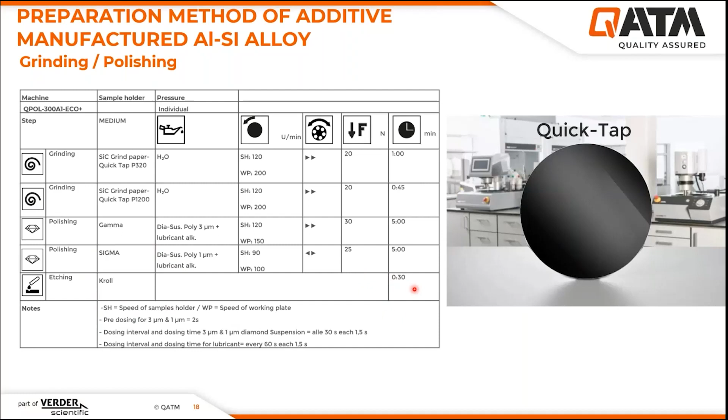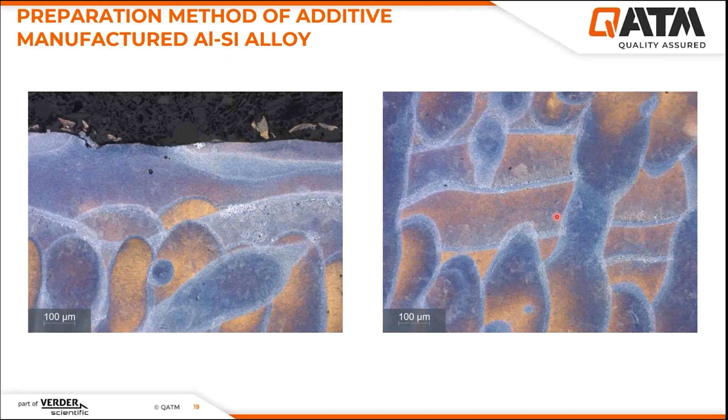Quickly, I introduce you to the preparation method of copper alloys, the additive manufactured copper alloys.

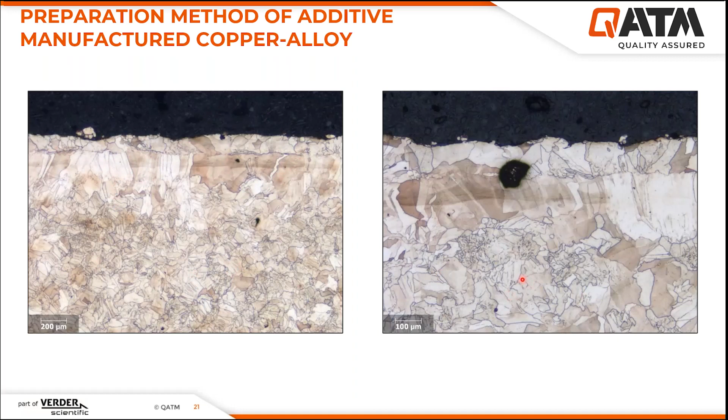Then you can see the coarse grains on the edge of the sample, and on the core area you can see the fine grains. To see the grain boundaries between these grains, it is very important to not have deformation in your preparation. The metallographic preparation is very important here to have very clear grain boundaries.

Here also, on the left-hand side, we can see the area with the finer grains, and also here you can see very clearly the grain boundaries between the different grains.

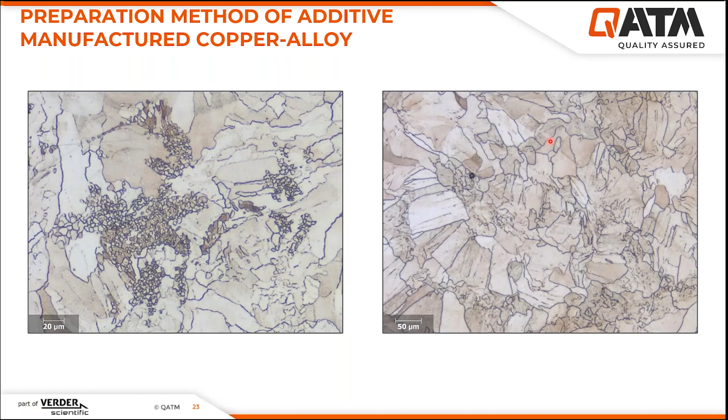For example, here you can see the dosing interval and dosing time for 3 micron and 1 micron is every 30 seconds for 1.5 seconds.

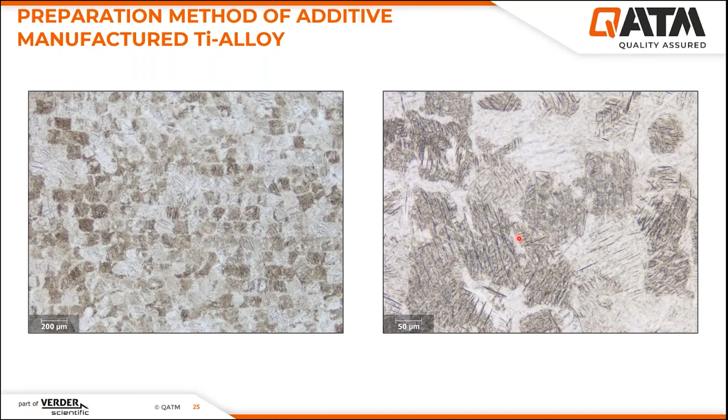Here is the microstructure of titanium alloy under the optical microscope, under lower magnification on the left-hand side and higher magnification on the right-hand side. Also, we can see some defects here, something like lack of fusion or some pores, visible at lower and higher magnification.

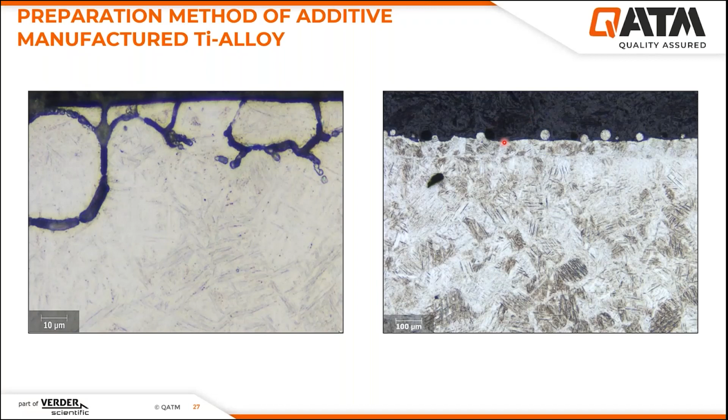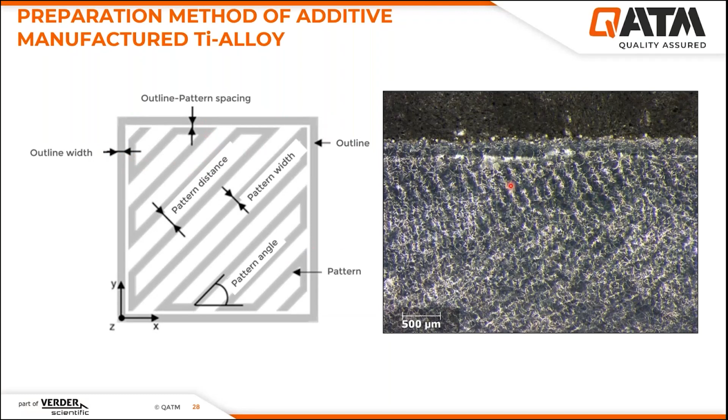And here once again you can see the edge of the additive manufactured samples without any gap and without any rounding.

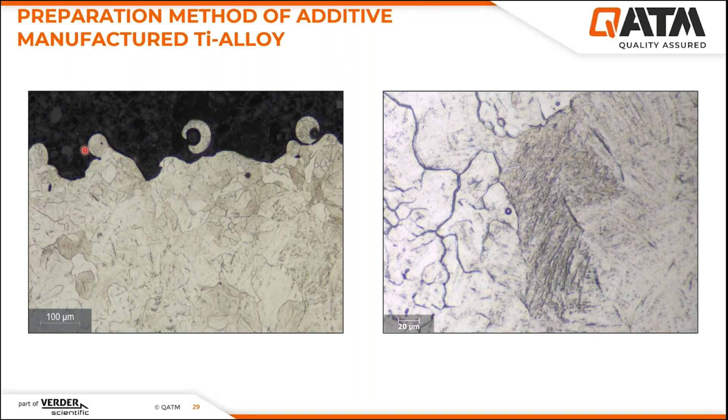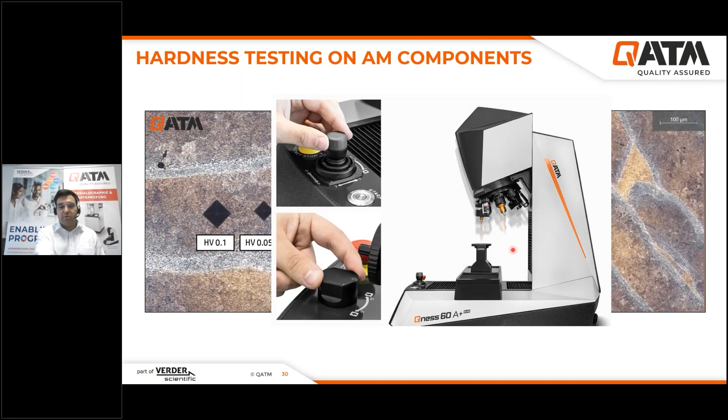To measure the porosity percentage, it's very important not to smear the material over the pores, so as not to cover and close them. The right metallographic preparation is very important here.

With this image analysis, I come to the end of my presentation. I want to thank you for your attention and wish you a nice day.